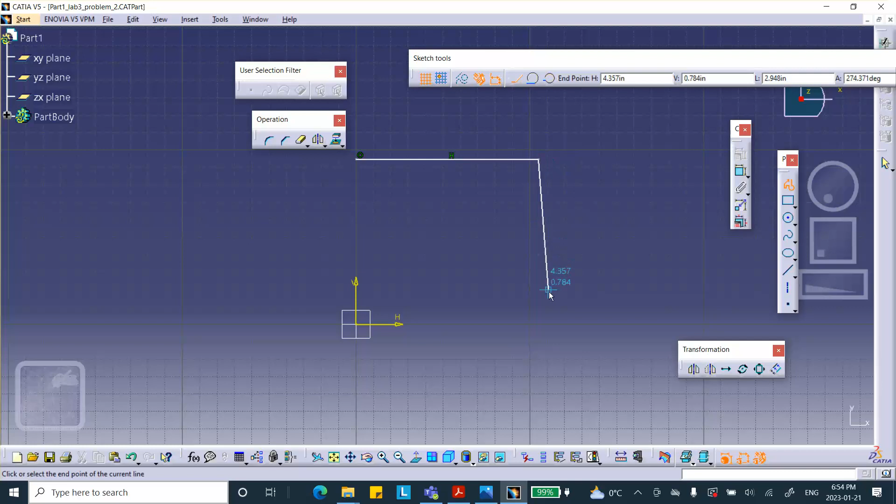Okay, let's dimension this. First of all, these side edges are 5 inches each. So this is 5, and this is 5, 5. All right, and this is 2.5. Based on the dimensions that are given you in the figure, you can check it out. This is 2.5.

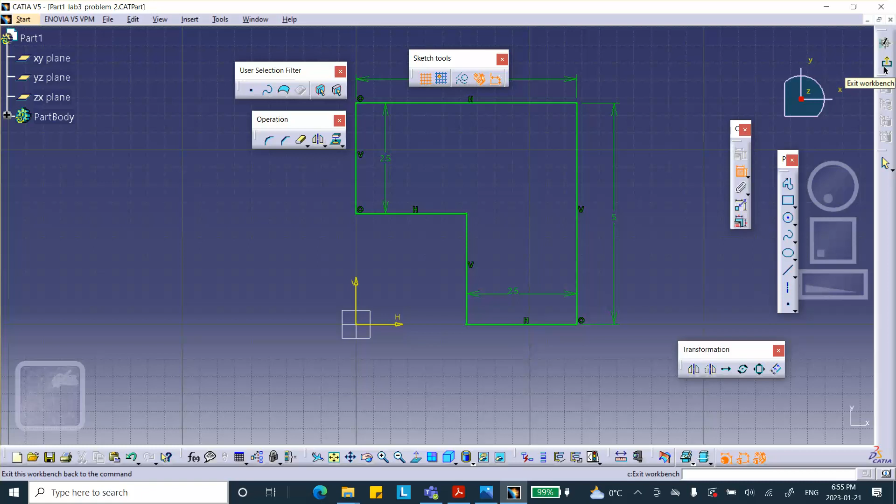Okay, and yep, exit, exit, padded up by 2 inches.

And on this face, I will sketch that little circle there, and we're gonna clean it up. A circle. For now, I'm gonna draw it like that. The total diameter of that circle is 1. And this circle is from this point to that point, it's 1.5.

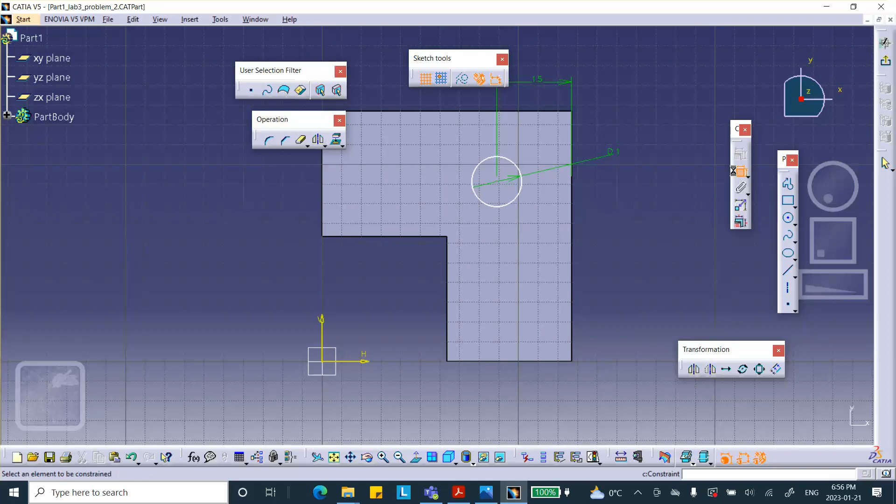And from this point to this line, oops, let's try it. From the center to this line is also 1.5. Exit, pad it by 2 inches. Yep. Okay.

Now, what I want to do is I want to cut this with a plane at 45 degrees. So let me make a plane first of all, which is at 45 degrees, and there are different ways of doing it. Please, you're not bound to do it the way I am, but anyway, here's a plane. We can do it by 3 points, for example. Where is it? 3 points. Let's see.

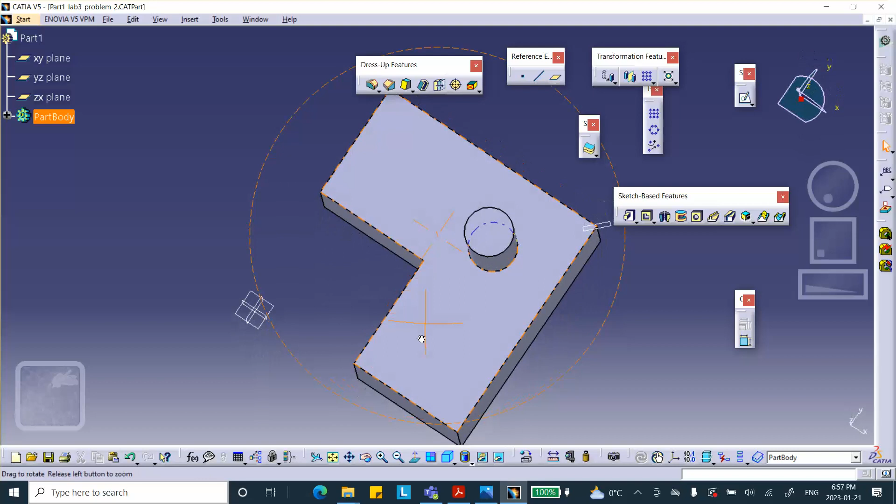3 points. I want a plane through that point and this point or the other one, it doesn't matter. So it does create a plane. You can see that it did create a plane, which is exactly at the orientation that I want.

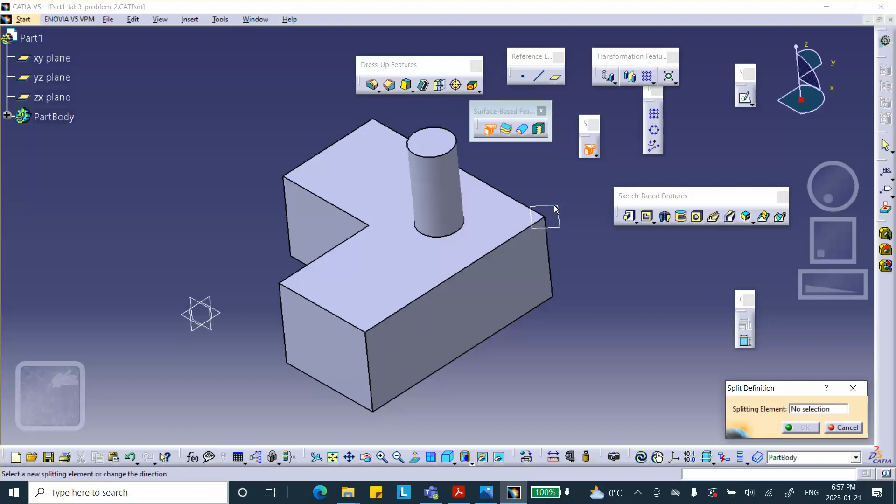And now I use the split. Where is that saw? We're looking for the saw, and the saw, I believe, is in this surface-based feature. See, saw right there. If not, just go and look for a surface-based feature and select this. It doesn't matter which side we pick. We pick this side or the other side, so it's going to cut it like that.

Actually, I would have liked the other side. No problem. Okay, flip it. Okay, good. Because I'm too lazy to rotate.

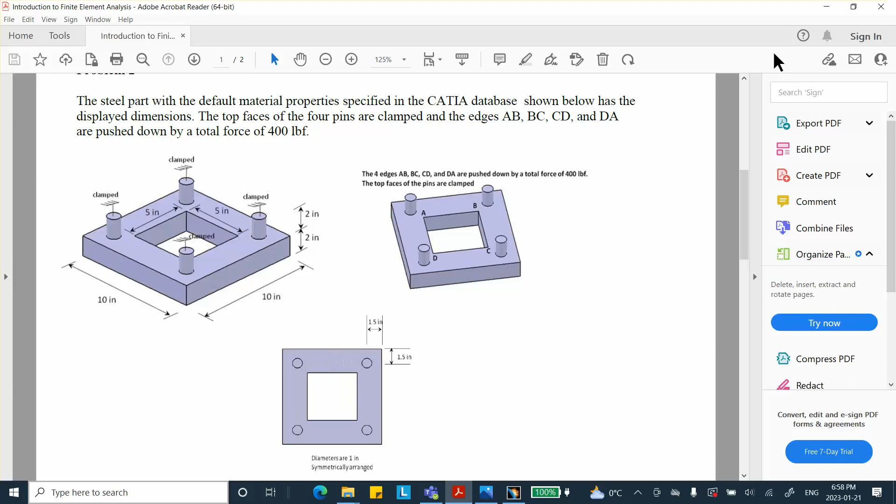All right, so we're going to make this thing out of steel with default material properties. So let's go ahead and just make sure everything is okay. So what we did, we created only 1/8 of this. Okay, good. So click on the material, apply material. Metal, steel is down here on that part.

Remember, for me, if I double click on this, my software on this computer is gonna crash. But for you, you can double click on this thing, go and change the appropriate Poisson ratio, Young's modulus, coefficient of thermal expansion, and whatever you want. Now, these things don't happen to me in class because over there I use my other laptop, and on the other laptop, the software is working properly, and I can change that. So whatever I demonstrated for you in class, there was no issue with it. But here, save everything. Good.

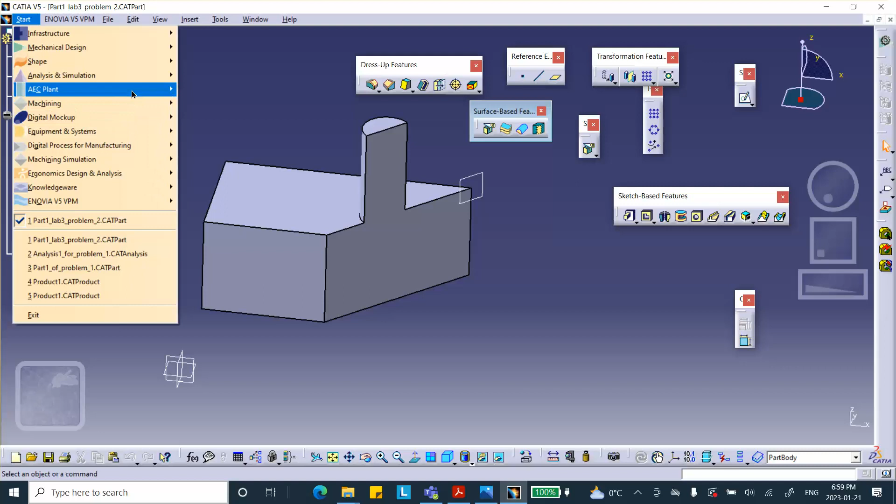So now we're going to go to analysis and simulation, generative structural analysis. Catia uses default static, which is good. That's what you want, and it meshes it based on the sizes that it sees. So let me see what kind of size we have here. A parabolic element. I mean, you can make this thing smaller. So remember, these things are critical. However, we are not spending too much time on it right now.

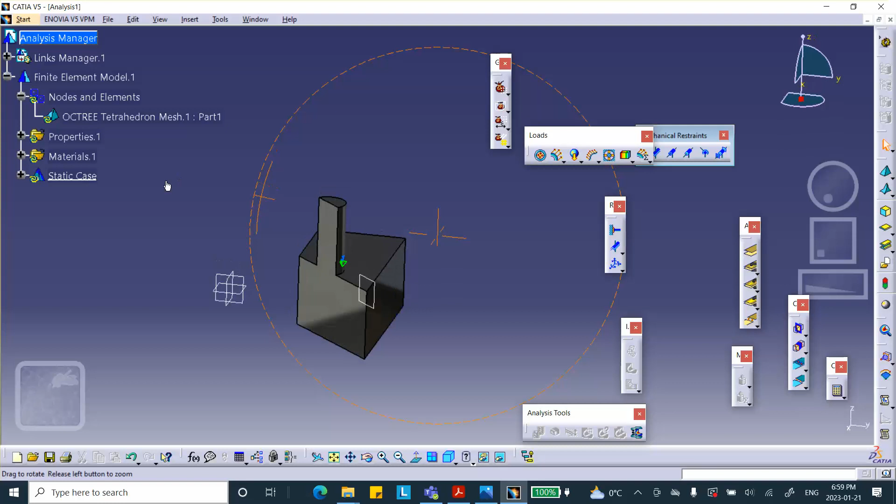If you want to look at the mesh, put the cursor on the nodes and elements, right click, mesh visualization, and it looks like that. Okay, so yeah, looks like that. Okay, deactivate the mesh. Okay, good.

Let me save the analysis file. File, save management. Part was saved, but the analysis is not. Save as, and I'm going to go one level up to the right folder, activity 2, and I'm going to say problem 2. How about that?

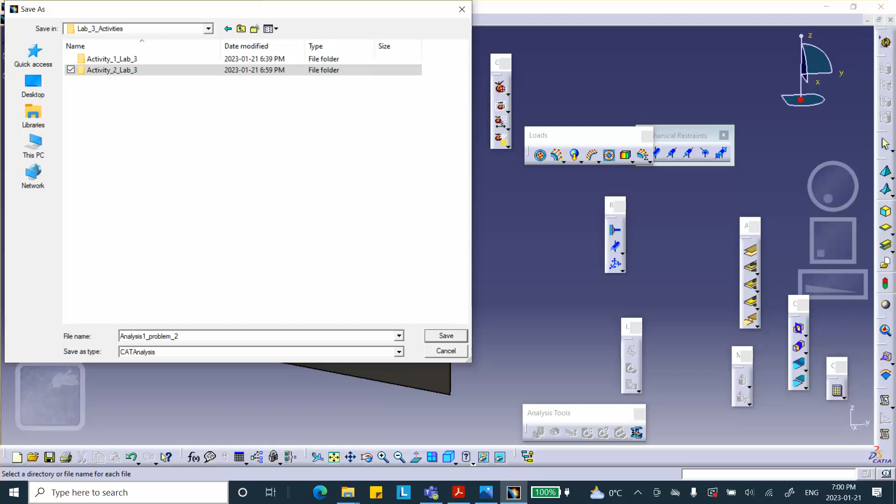Please make sure you master these things so that you don't overwrite things on a test and final exam. That's why I'm giving them different names so that I can recognize them. All right, the top is clamp, clamped icon, surface slider, and other stuff, and user defined. Don't worry about this last guy. On purpose, I don't want to talk about it right now.

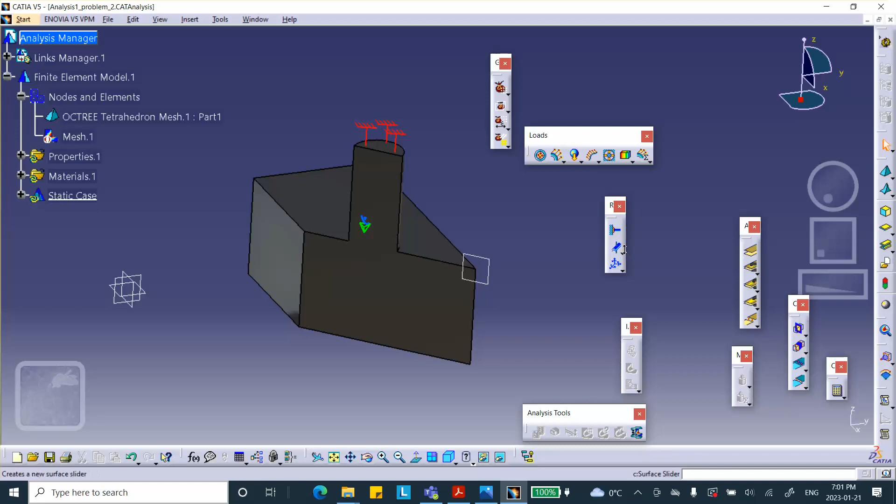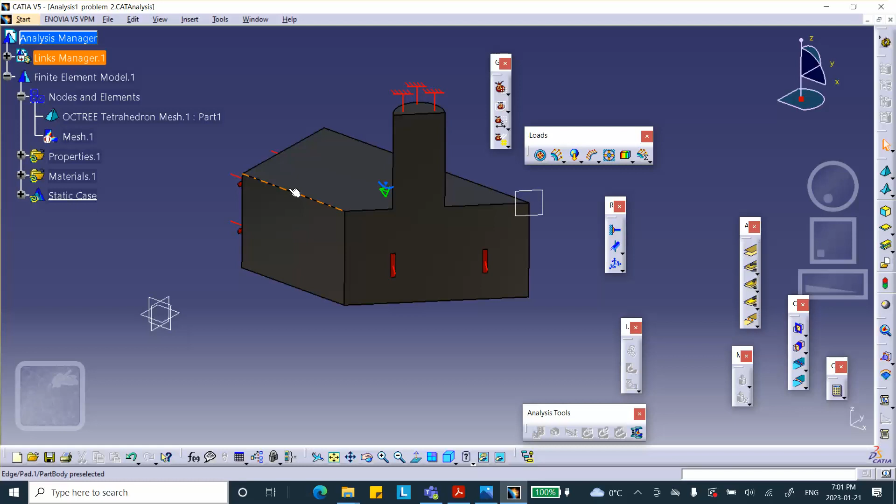Now, this is a plane symmetry. So put a surface slider here. See that? Surface slider, the first one. See? Click there. And this is a plane symmetry. This side and that side are plane symmetry. And what are we doing? We are applying a force of 50 on this edge because it was 400 on all four edges. This is half of one of those edges. So I'm going to apply force on that edge in the direction Z.

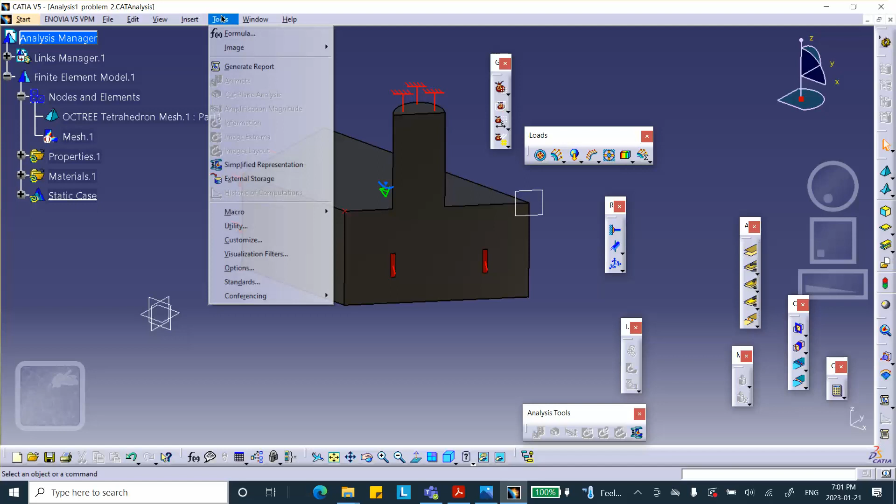Direction Z. Now remember, these are Newton. If it's bothering me, I can go and change these units to pounds. I can do it right now, but let me not do that. Go to tools, options, parameters and measure. Let me find the force and change it to pounds. Now, you can click on magnitude so that it puts it in the alphabetical order and find the force that way. Force right there instead of Newton. I'm going to go to pound. I could have typed 50 pounds there, lbf, but I decided not to.

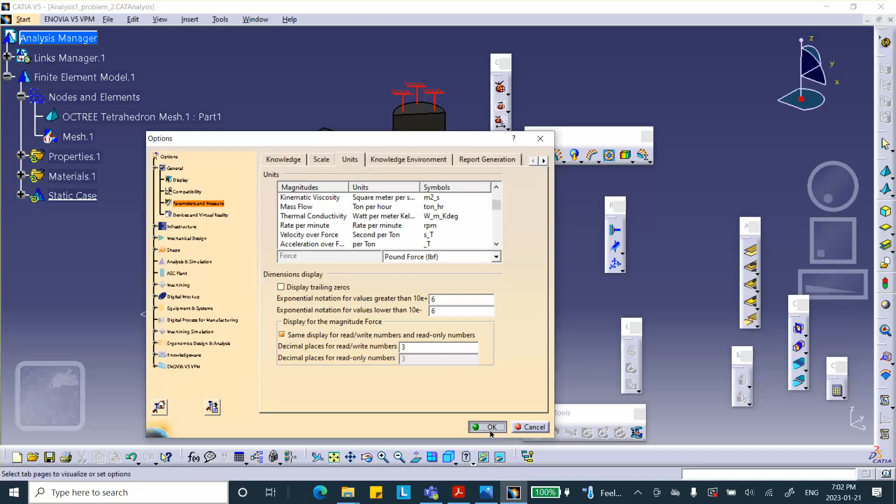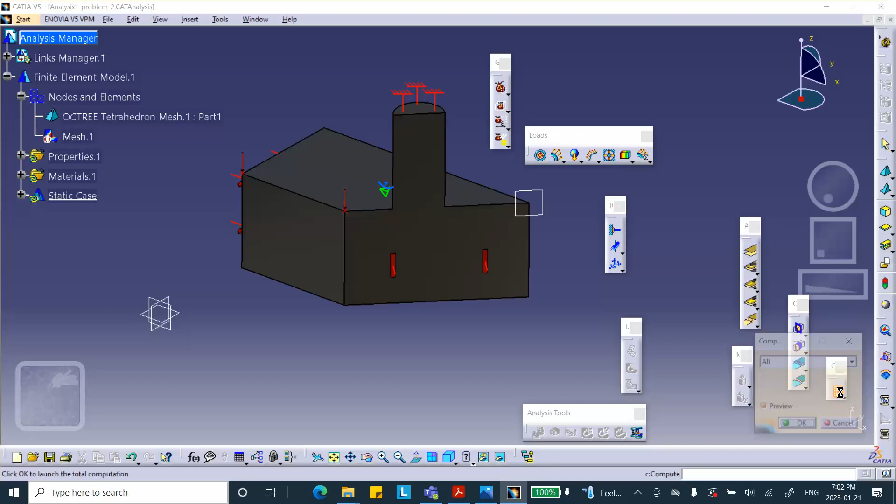Clicked on it, go to pounds. So I don't have to worry about watching things anymore. So force on that edge, notice that it says LBF, so negative 50 pounds. Click on the save, click on the calculator. Actually, this says compute, doesn't say calculator. Click on it. Ignore that message. In the newer versions, you don't get that message. And say yes, run it.

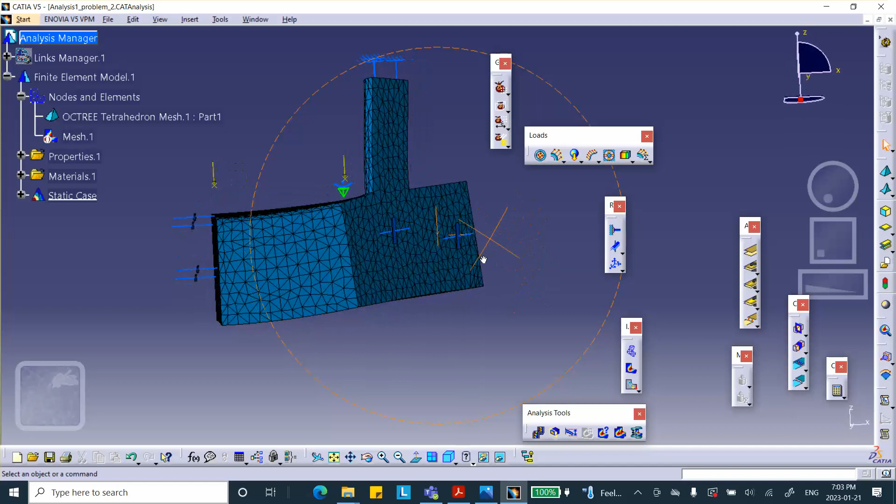No issues. You want to look at deflection? There we are. That makes sense. These faces remain flat because there are surface sliders on it. And of course, you're pushing this thing down. You can look at numbers if you want. You can animate it. Here's the strip of film. Animate. That's the way it should be, right? When you apply force on that edge, it's going to go down. If you want numbers, you click on the displacement and notice that every node will go down.

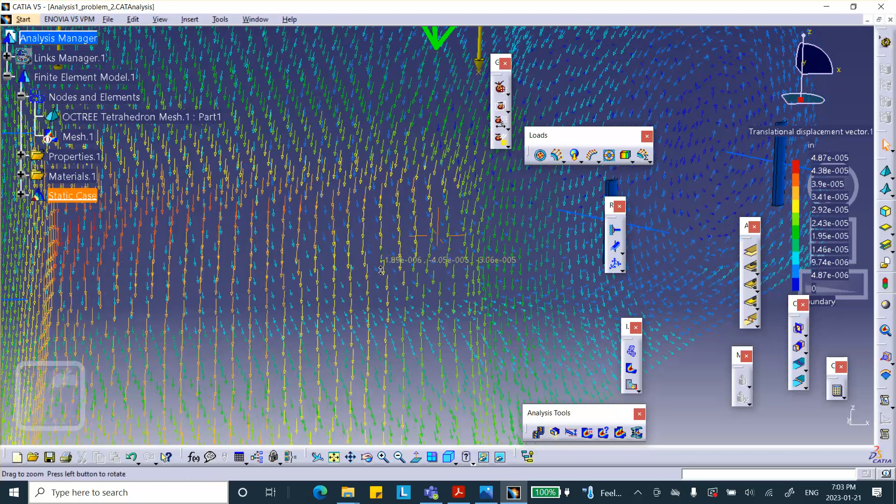Okay, double click on it, select the average ISO under the visualization tab, and there we are. And this is a very tiny amount because it's a very bulky piece. 50 pounds is nothing. If you want to look at the von Mises stress, you click on it, and these places where you don't have fillets, you have big stresses. Now, the reason you have big stresses there is not only the fact that there is no fillet, but because you're applying an edge force. Edge force is just putting a knife there and trying to push it down.

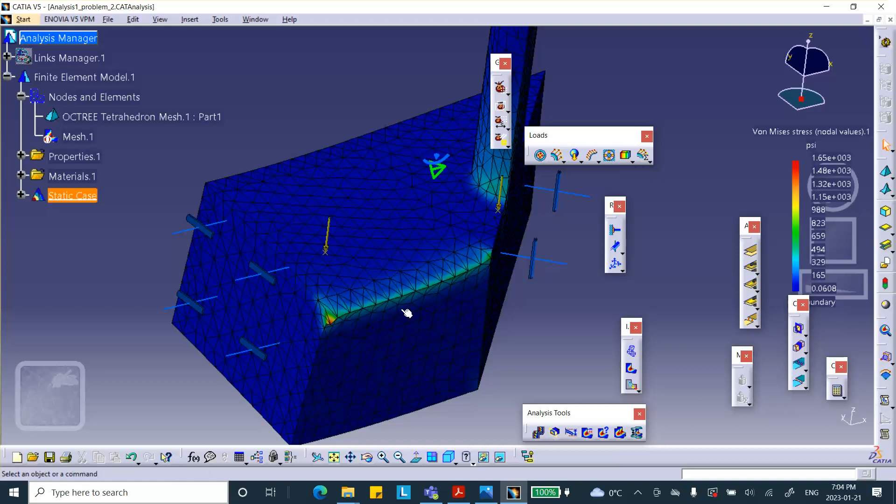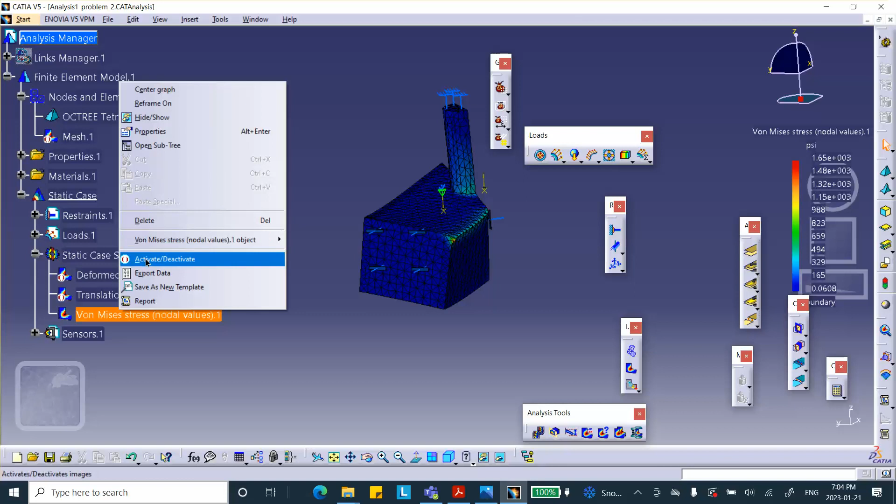Okay, so you've got to be careful. Now, if you want to look at the stress distribution elsewhere, not close to these, you have to be very careful. There's no way you can apply edge load, but let's pretend that we can. So let me deactivate this plot and look at the stresses in this area. So let's make a group, and there are different ways of making group. I talked about it in the first tutorial.

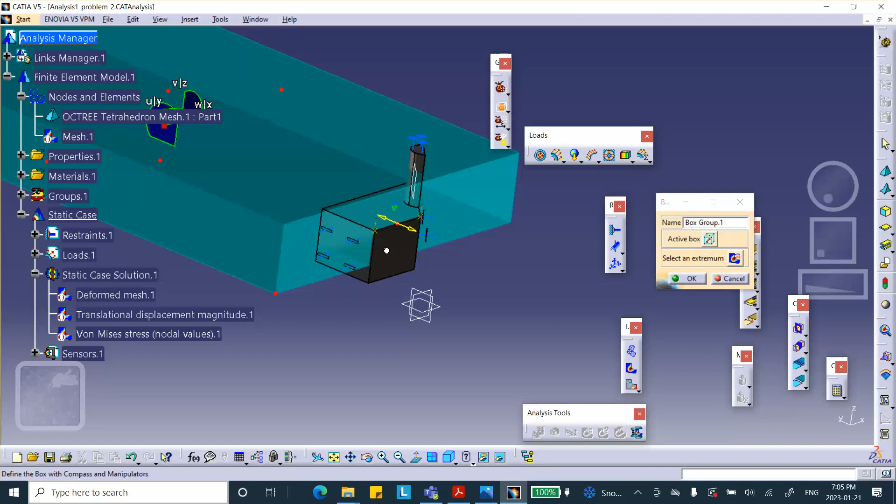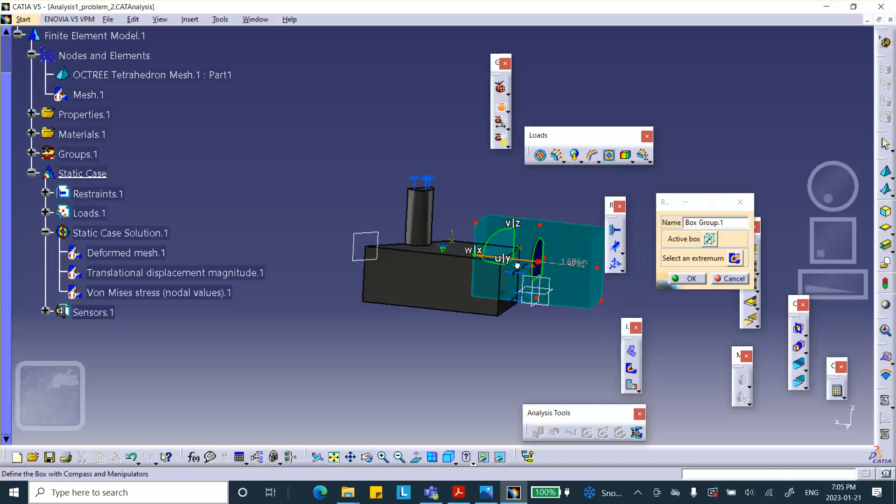There we are. Except that I want to move this thing. It's not in the right spot. So let me try to move it for you. First of all, I can take this and move it there and resize it as I see fit. It took the last one that I had from the previous example, move it further, and let me see. Yeah, this is too big. I don't need it. It just confuses me. I don't need that box that big. Oops, in the wrong spot. Aha, that's better. So we can look at the stresses in that area. In fact, if you want to go all the way down, you just go down like that.

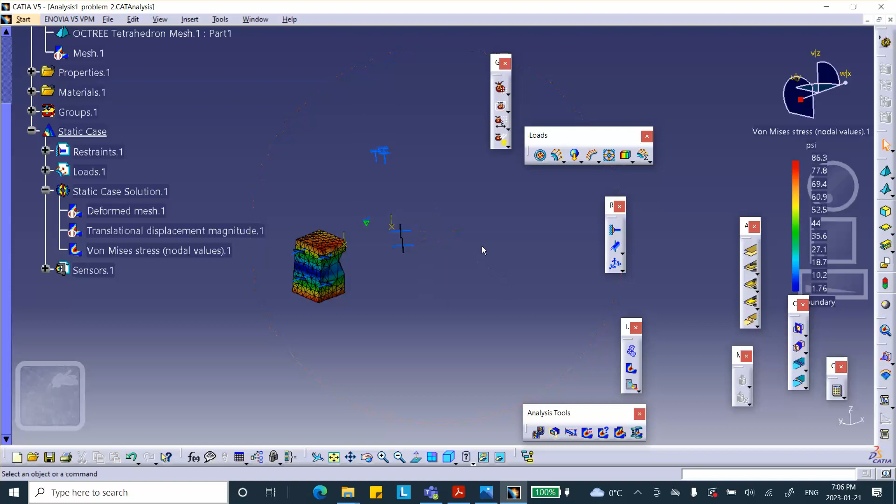And you can hide the group. Look at the von Mises stress right here, activated. Double click, but select the box group right there. So it puts away all that junk here, which were caused because of the edge load and also because of the lack of fillet there, and it shows you the von Mises stress distribution through this. I mean, they're very low. This is steel. Basically, that's nothing.

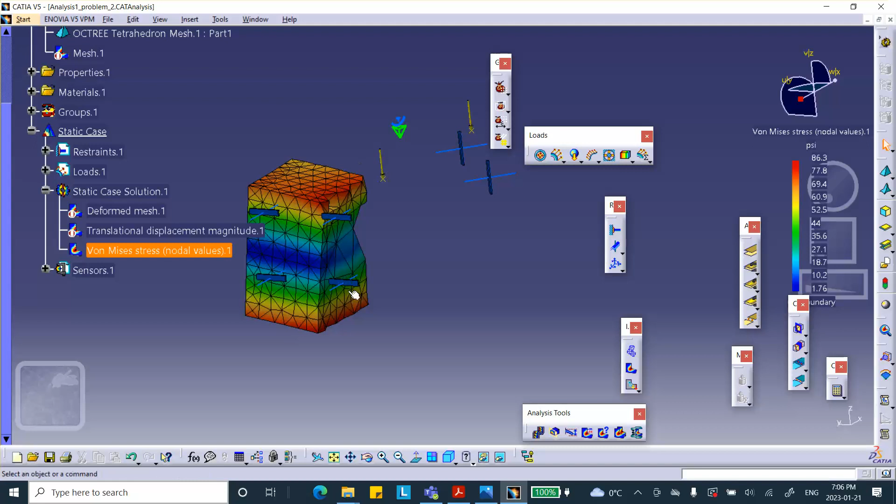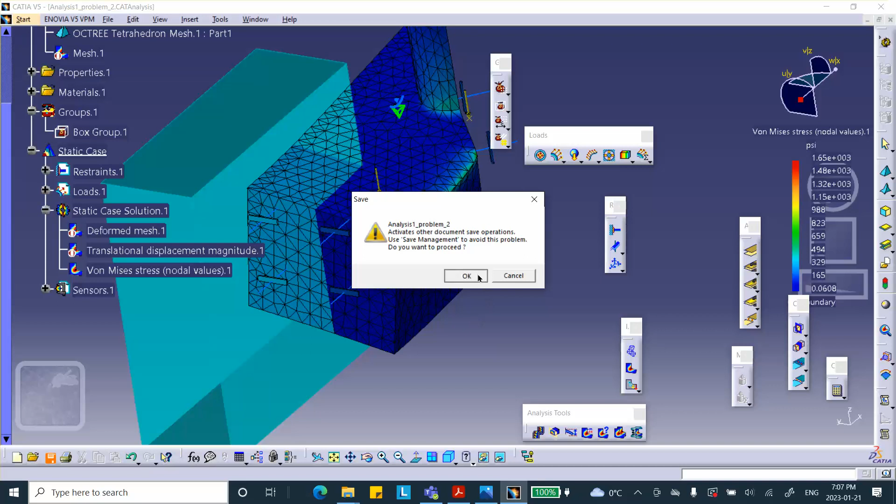But with the other ones being there, those unrealistic ones, or perhaps bad ones because of the way you modeled a load as an edge load or concentrated force, it masks the stress distribution here. That's why this all looks blue. If I double click on this and say show me everything, where's my group? Let me show you group. Those colors were in this area, but we cannot see it because these are gigantic stresses that are not realistic. So save it, and this takes care of the second problem.